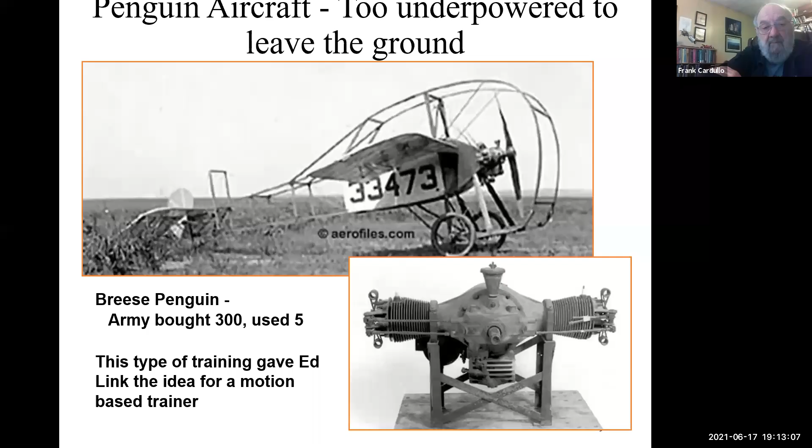Then we enter Ed Link. Ed Link lived in Binghamton, New York, and his father had a piano and organ factory. He became very prominent for his invention on the Blue Box and much of what came later.

Actually, there were three major pioneers in simulation: Ed Link, Richard Dehmel, who worked at Bell Labs and came up with an electronic version of a flight simulator, and Ed Link's, which was all mechanical, at least initially. Admiral Louis de Florez was obviously in the Navy, and he was a very strong force in convincing the Navy to invest heavily in ground-based simulation. The AIAA now actually honors him with annual awards in flight simulation.

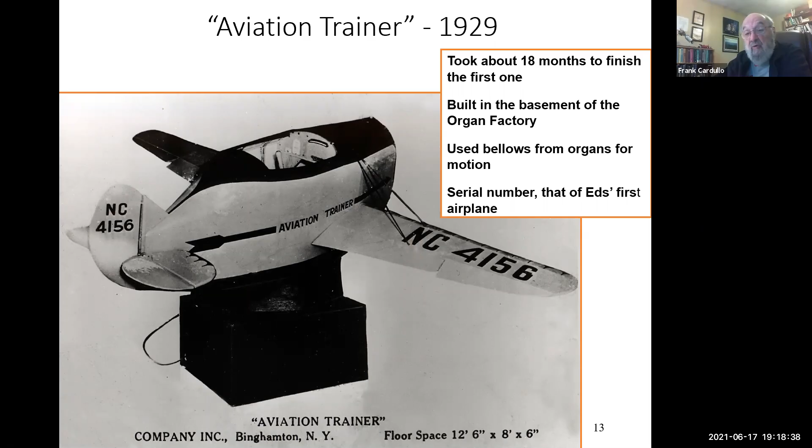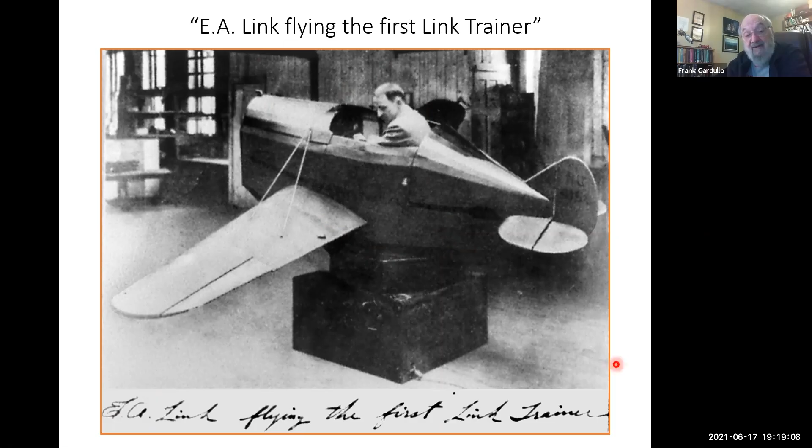More or less, prior to this time, if you moved the controls, there was some mechanical linkage between the controls and the pneumatic bellows and the valves on the bellows, and he was able to correspondingly pitch and roll the device based on those inputs from the pilot. So there were no flight dynamics involved in this.

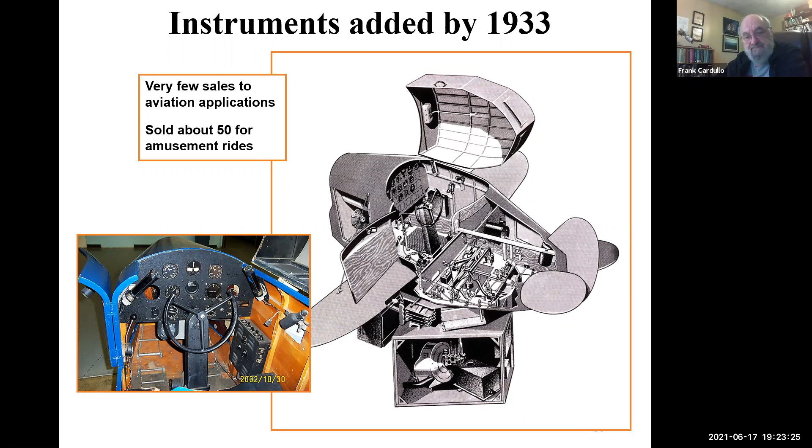So we move into the war years, mainly the Second World War.

So the RAF purchased a number of Link flight trainers, as did the Canadian RAF. And in fact, for both the British and the Canadians to buy the Link trainers, Link had to build a factory in Canada, just across the St. Lawrence River, to produce the simulators that they would buy.

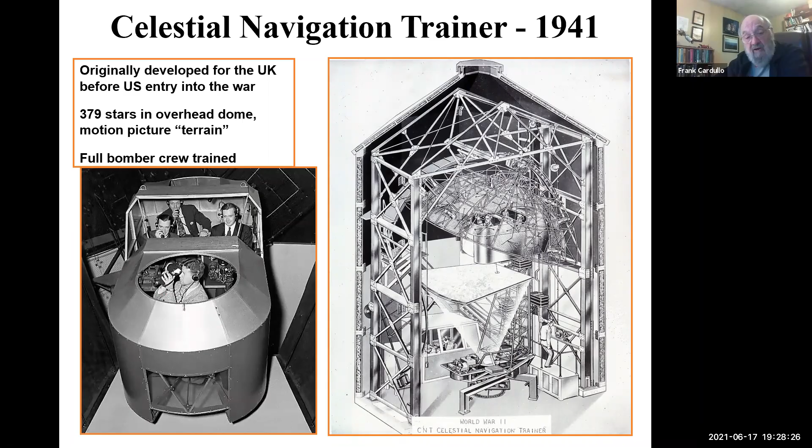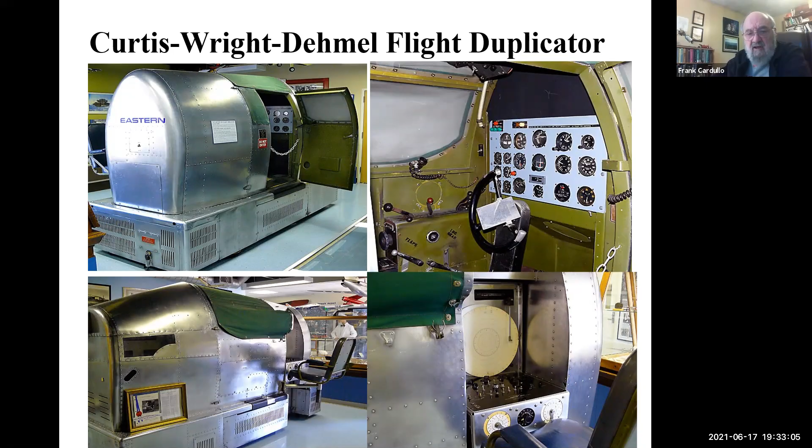So they sold a very large number of these. Dehmel actually didn't get the patent until after they started building these things. I don't really understand how this worked, but before he got the patent, he licensed the production of these to Curtis Wright. I don't know, unless things were a lot less litigious in those days, and people trusted each other more, perhaps. They went ahead and built a number of these, but in the end, they built a few other types. They shut down the simulator operation, and then eventually shut down their aircraft operations.

So we move into the post-war years. After the war, the military interest in flight training waned, and Ed Link was looking for other ways to make money and sell simulators. So he developed this thing he called the School Link, and he tried to sell these to high schools and colleges. They were intended to help teach math and science as well as flying. They never caught on, and the effort ended after about 3 years.

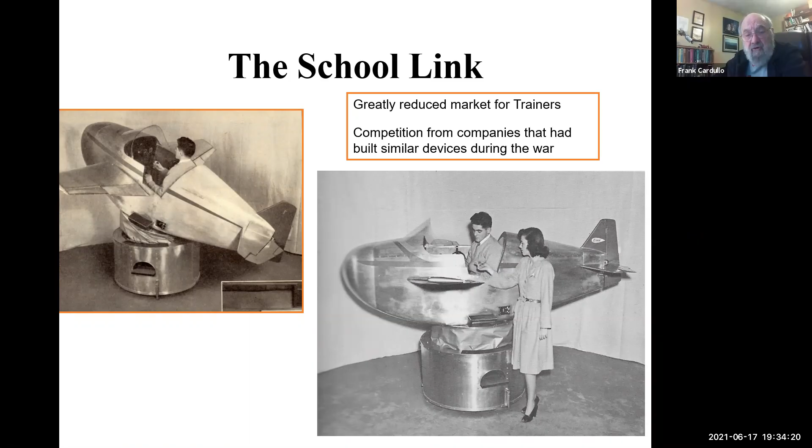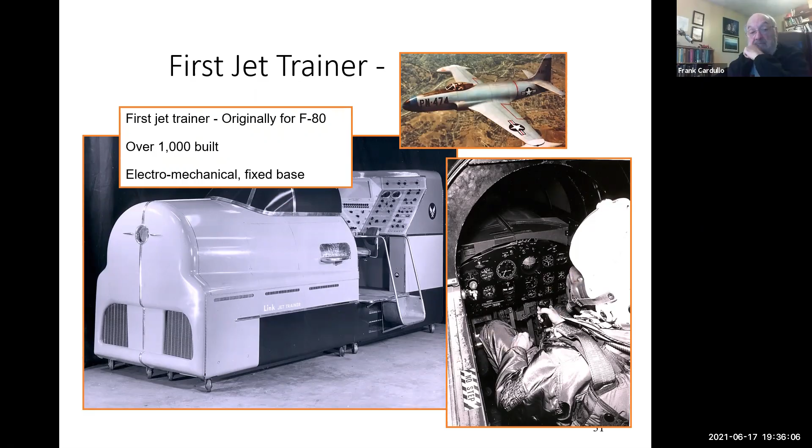And the C-11B, around 1950, that was for the F-80 Shooting Star. It got modernized, and here is the instructor station, the pilot station, and a picture of some of the servo mechanisms for driving instruments, etc.

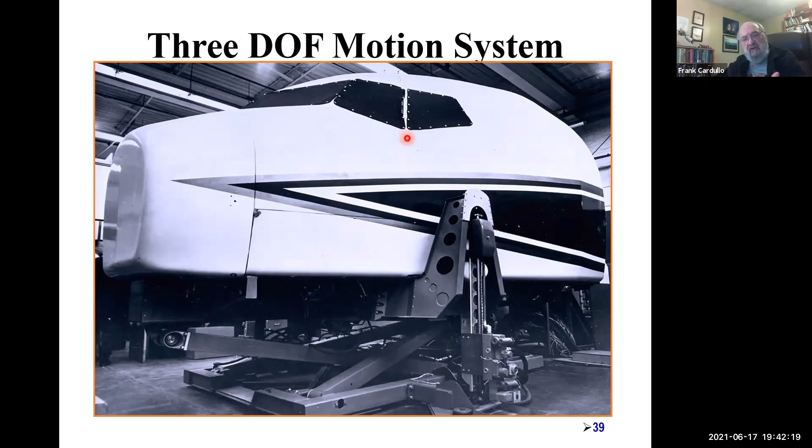There were believers and disbelievers, and the issues are much more complicated because of the interaction with visual systems. Notice these simulators up to this point didn't really have much in the way of visual systems.

Around 1967, Link came up with, some would say, an updated blue box. It was the GAT-1, a single engine light aircraft simulator, and this was also analog.

So the GAT was a single engine airplane. Later on came a GAT-2, which was a twin engine, and a GAT-3, which was a small general aviation jet, all electronic trainer. No visuals, but here we start to get some of the visuals.

They crept in all along in this chronology. Visual systems in simulators must have some kind of an image generator. They've got to generate an image, and then they've got to be able to display that image.

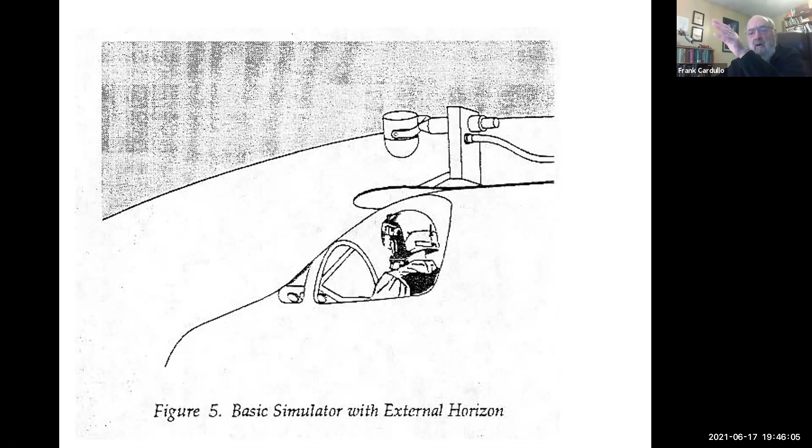Later on—oh, looks like I lost a slide in here. I had another slide that was also relatively early on, with slightly different technology, but it was basically this very rudimentary system. Somewhere along the line they got dubbed Sky Earth systems, even though there was no actual picture of sky or Earth necessarily. But later on, some of these camera model systems came along.

The other slide that I had was a predecessor to this, which was a moving belt display. It was all black and white, monochrome, and it had a belt that moved, and it was continuous, and narrow. It was suitable primarily for practicing landings, where you got set up on the glide slope to a landing, and it was a pretty good device.

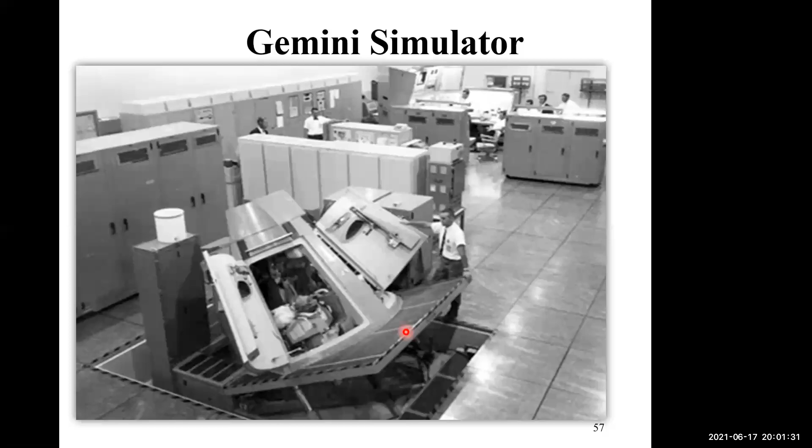Long endurance, I bet, Frank. Long endurance? Well, it was long endurance, sure, that was a factor. But there was another, anyway—it was also the first to be able to change their orbit. Mercury could not change their orbit. Yeah, that's true, it's not the one I was thinking of, though.

But nevertheless, there were a bunch of things that were precursors they needed to demonstrate could be executed in space if a mission to the moon were to be successful.

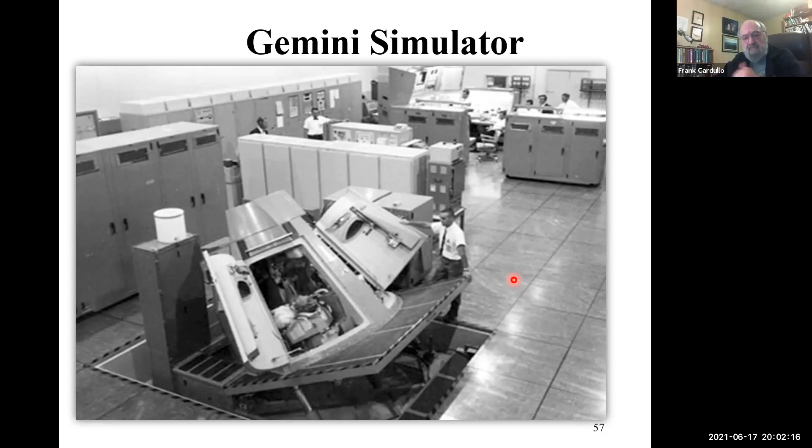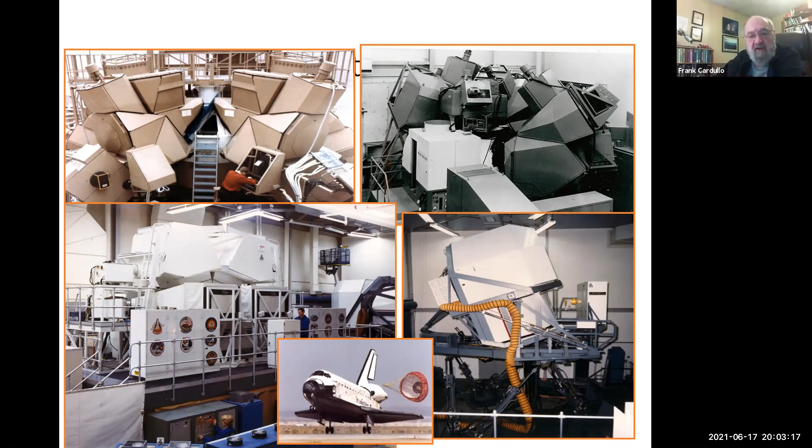I'll have more to say about the Apollo simulators in a bit. But in addition to training, these simulators played a major role in the recovery effort for Apollo 13. But on the way there, most people even forget the existence of the Skylab program.

Skylab was a program for solar physics experiments, to conduct solar physics experiments in orbit outside of atmospheric issues, by humans who could make judgments as they proceeded. This simulator was also built by Link, and I worked on this one. My system was the control moment gyro attitude control system, but mostly, almost exclusively, it was solar physics.

There were some issues associated with: can humans live in space? Can they eat? Can they socialize? Can they sleep? So this was really the first space station.

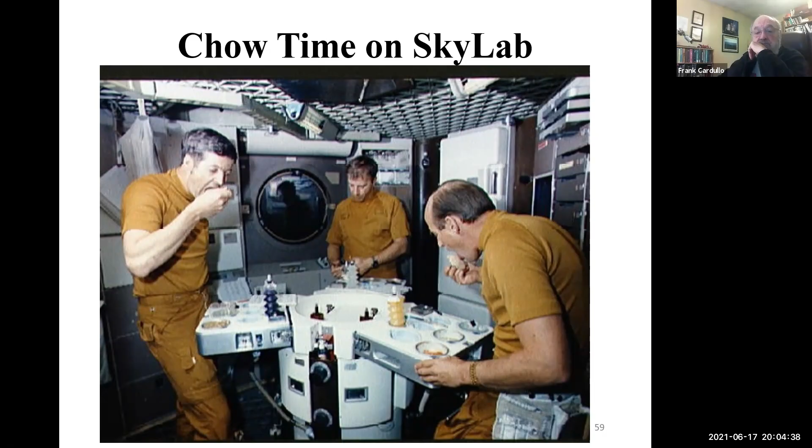And then we move on to Apollo. So the Apollo mission simulators were extraordinary devices, absolutely extraordinary. They simulated the entire cislunar mission.

From launch into Earth orbit, and a maneuver to remove the lunar module from the S-IVB stage and attach it to the command module for the translunar missions. So the translunar injection, lunar orbit insertion — the dashed lines indicate the back side of the moon.

And coming around, after a couple of orbits through what was referred to as high gate and then low gate, and then finally approach and landing.

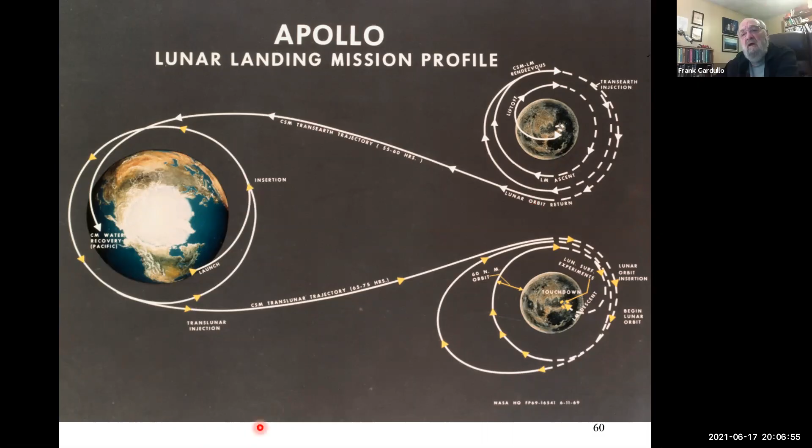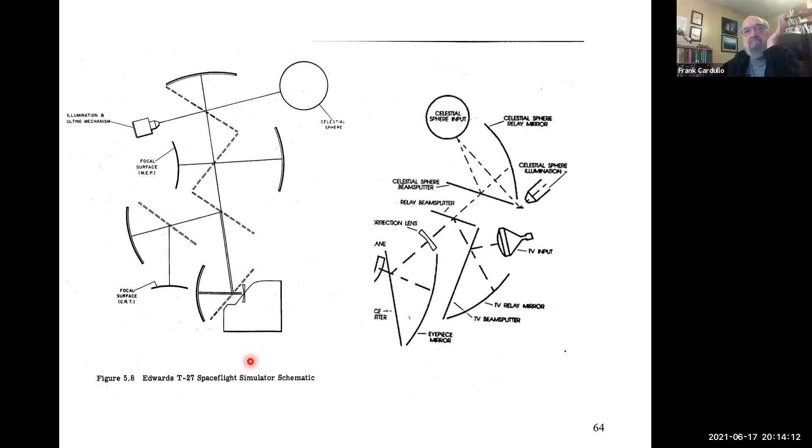So there were many elements—optical elements of the visual system. Actually, this isn't the slide I wanted. There were several different systems for displaying certain aspects.

There was something called the mission effects projector, which showed—its basis was orbital film, and it had equations derived from orbital mechanics. There were three film cassettes you could shift between as you had continuous orbits about the Earth or the moon. The orbital mechanics involving inclination, perigee, apogee, and all that sort of stuff were all in the mathematical models, and the films were driven on that basis.

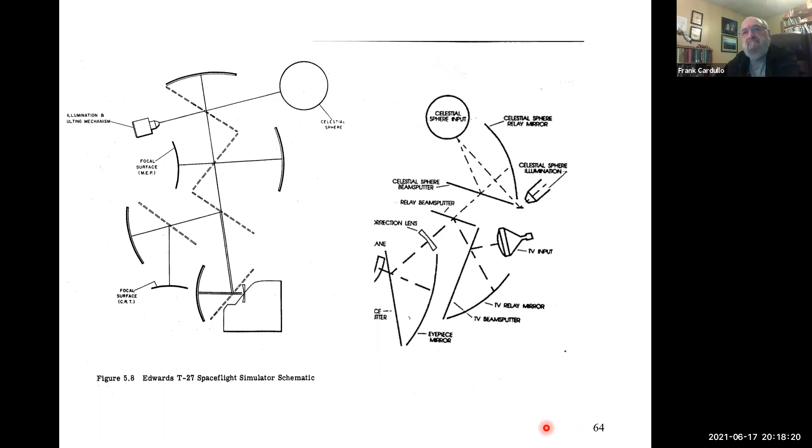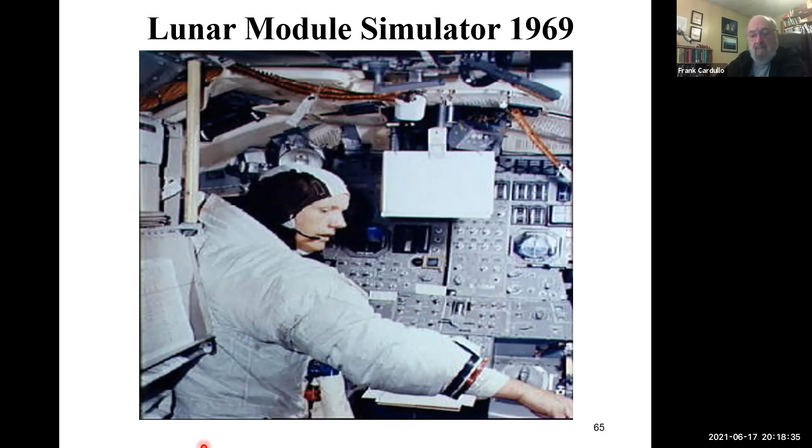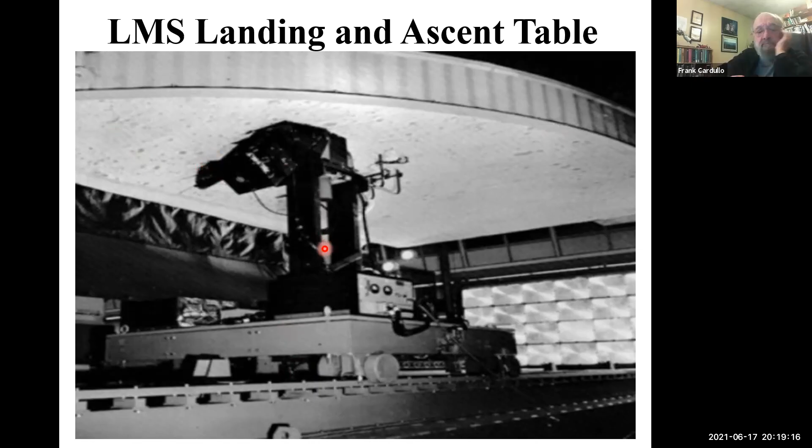The mission effects projector math model—this wasn't code, it was later coded into assembly language, but the math model itself was about 300 pages. So there are a lot of equations and logic in this.

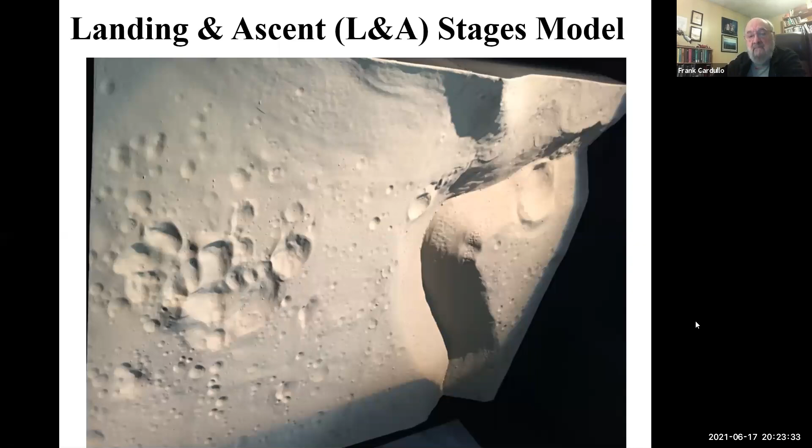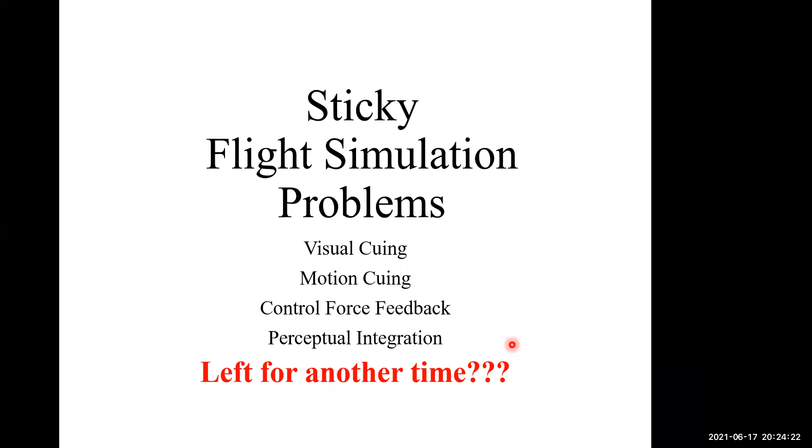So that brings me to the end. I mentioned these sticky flight simulation problems, and it's got to do with visual, motion, and control force feedback. It's human in the loop control, and there are all kinds of problems that get upset. In the modern day of flight simulation, where we've got great technology and great computing machines, we're still not doing a really good job of dealing with these integrated, perceptually integrated problems. Maybe at another time we can have a talk about that.

So I thank you for your attention. I'm sorry it went longer, but I hope it was interesting. So I can take any questions if you have any.